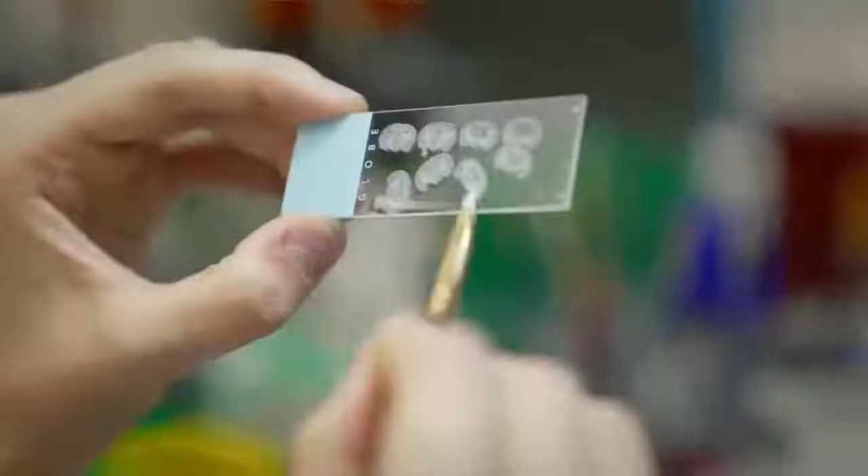My name is Ilaria Drago, and I am the Head of Education Outreach here at the Max Planck Florida Institute for Neuroscience. The high school summer internship is an internship open to the rising juniors and seniors attending a Palm Beach County school, and it is an opportunity for high schoolers that are passionate about science to spend 6 weeks in one of the Max Planck labs or core facility and work side to side with Max Planck scientists on a real scientific project.

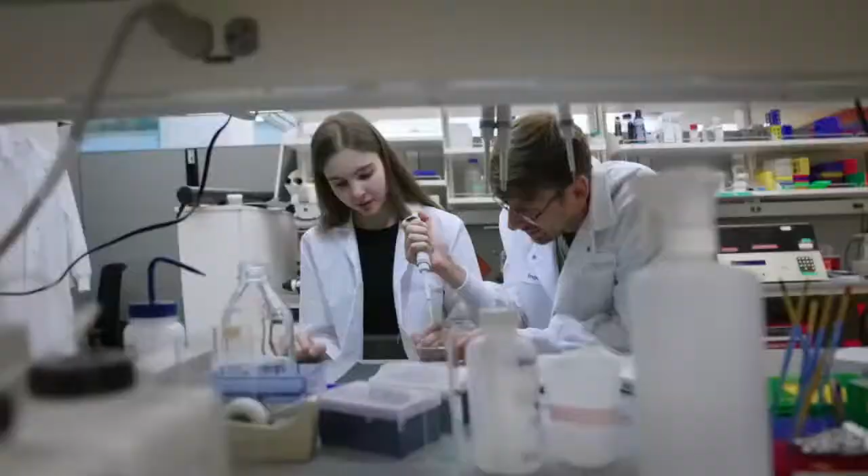This internship is the perfect opportunity for students that are excited about science and they want to move from the books to really get their hands on in real experiments, to experience the frustrations and the joy of seeing the result of your work and to understand something for the first time as a scientist and possibly having an impact on the future. They all just really want to watch what you're doing. They also have the opportunity to build long-lasting relationships with their mentors, their peers, and other people they encounter here at the Institute.

When I was applying for this internship, I was hoping to get more knowledge in neuroscience because it involves a lot of my favorite subjects in school, such as biology, chemistry, and physics, as well as some practical experience and valuable connections. I've been able to learn about new technology and how to use it, including the confocal microscope. I've actually been able to patch a few cells yesterday, so that was really exciting for me.

I'm on a robotics team with many other previous Max Planck interns, and each one of them, after the internship, came back a better engineer and a better designer. I've had the opportunity to use different CAD softwares. I've always been interested in pursuing engineering, but definitely more interested in now doing engineering as related to the human body and the human brain.

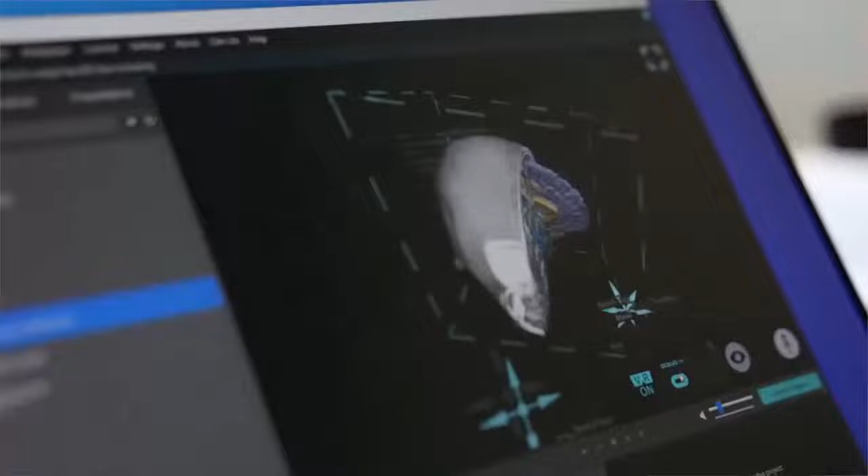You're not going to find a specialized neuroscience center like Max Planck anywhere near here. The fact that it's just in our backyard and it was open for us was a really amazing opportunity for me. I've had the opportunity to do a lot of things. I've been playing around in VR, viewing a lot of different brain MRIs, cells, synapses. I've been able to watch a few mouse surgeries. I've been able to watch virus injections, immunostaining. I've been able to see basically anything I want to see. I've been able to find someone who's willing to show me.

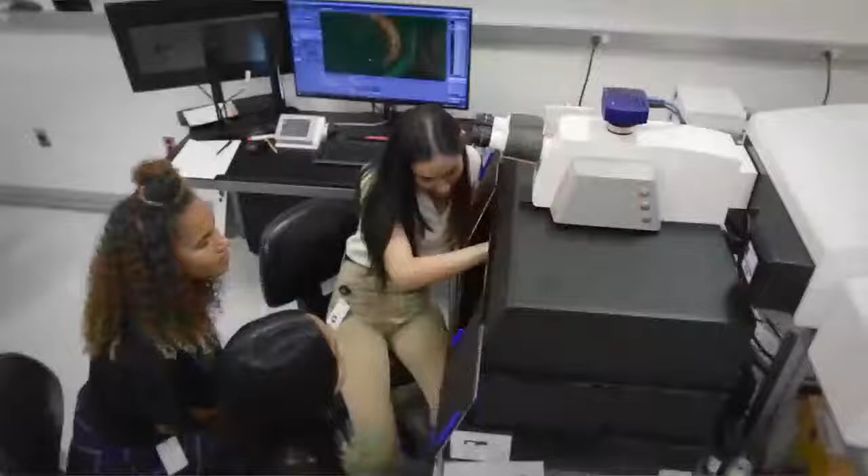This internship has gone on to solidify my love of neuroscience. We've gotten a lot of opportunities and experiences here at Max Planck. I've gotten to watch a lot of brain surgeries on mice, such as viral injection, and I've learned a lot about reading articles and doing scientific research, as well as using the light microscopy devices like the STED and Airyscan. This experience gives me hope for the future.

Sometimes there is this stereotype that high schoolers don't care much about the greater good of the world or they don't have big dreams. And I have to say that these students, year after year, they give me more hope for the future because they are not just smart and they are going to do amazing things in their life, but they are also kind, genuine, and humble humans.

So this was a video about our high school summer internship, and actually today you're going to hear more from one of our high school interns.

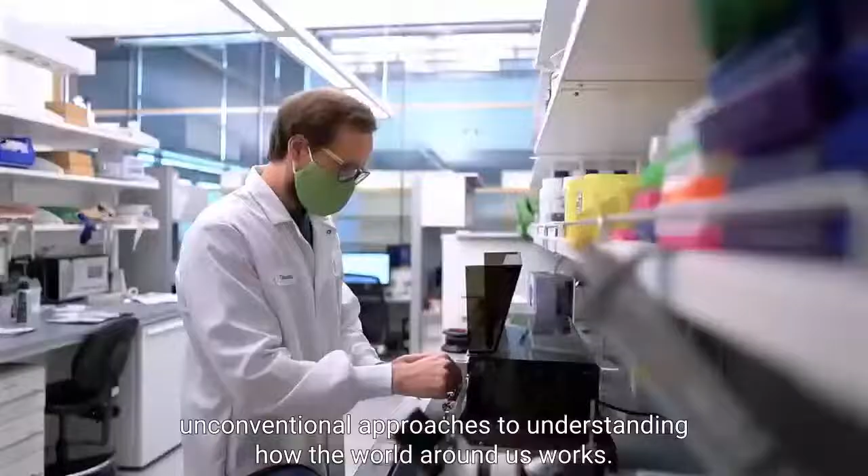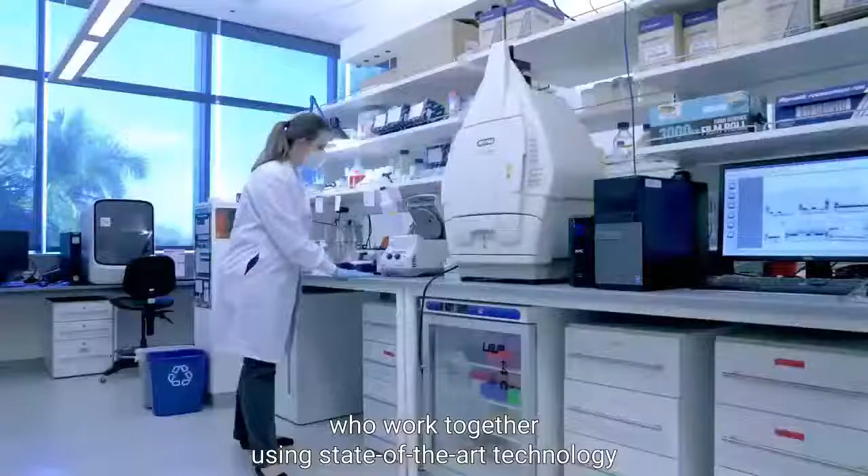What makes a Max Planck Institute special is our emphasis on curiosity-driven discovery. We encourage our scientists to take bold, unconventional approaches to understanding how the world around us works. MPFI brings together scientists at all career levels, from high school students to seasoned research group leaders, who work together using state-of-the-art technology to help unravel the fundamental mysteries of the brain. Our institute is located on a shared campus with Florida Atlantic University and Scripps Research, allowing us to engage in exciting scientific partnerships.

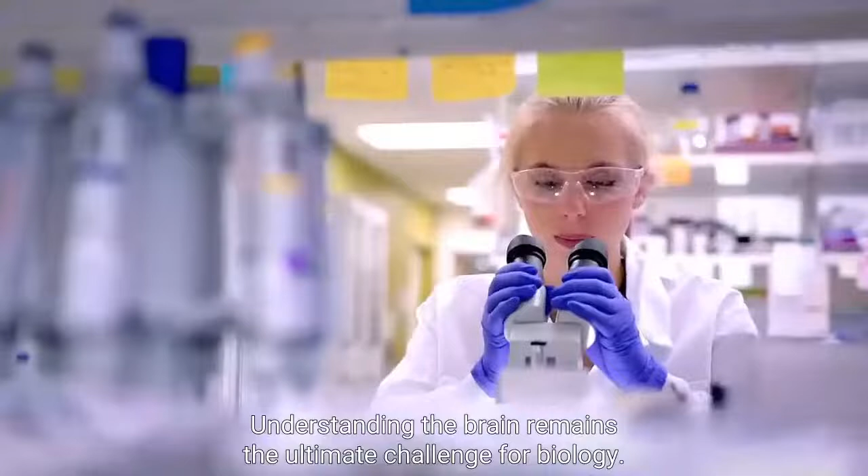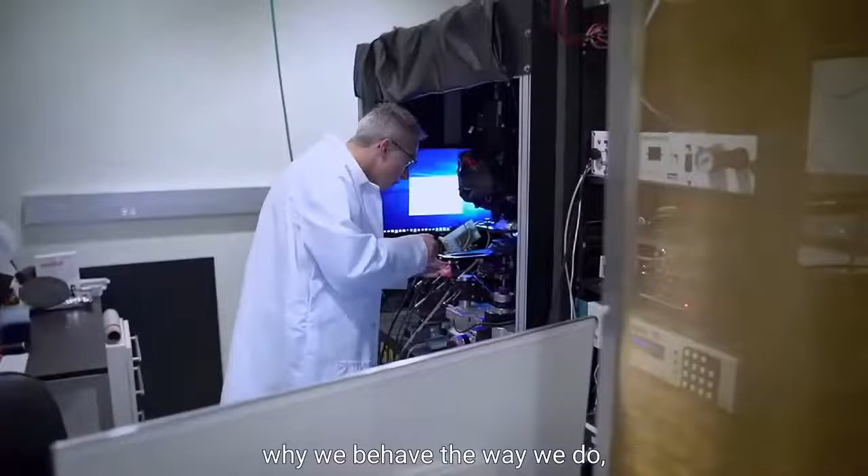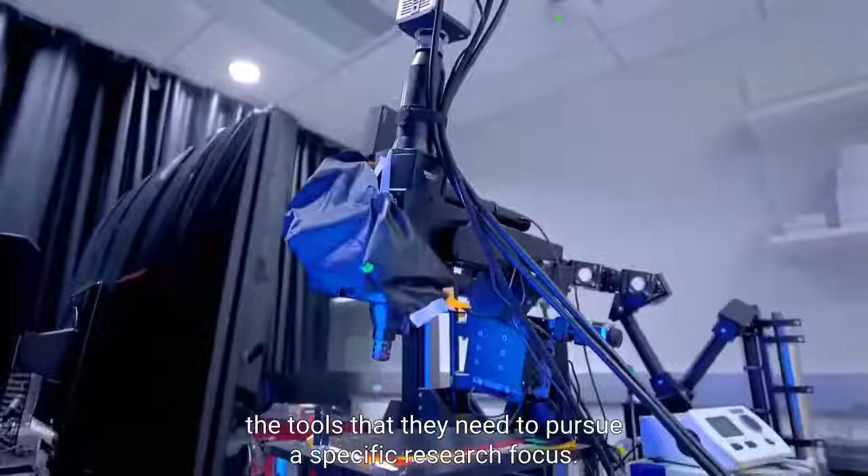Understanding the brain remains the ultimate challenge for biology. Neural circuits, the complex synaptic networks of the brain, hold the key to our understanding of who we are, why we behave the way we do, and how the debilitating effects of neurological disorders can be stopped. Flexible spaces make it possible for scientists to build and customize the tools that they need to pursue a specific research focus.

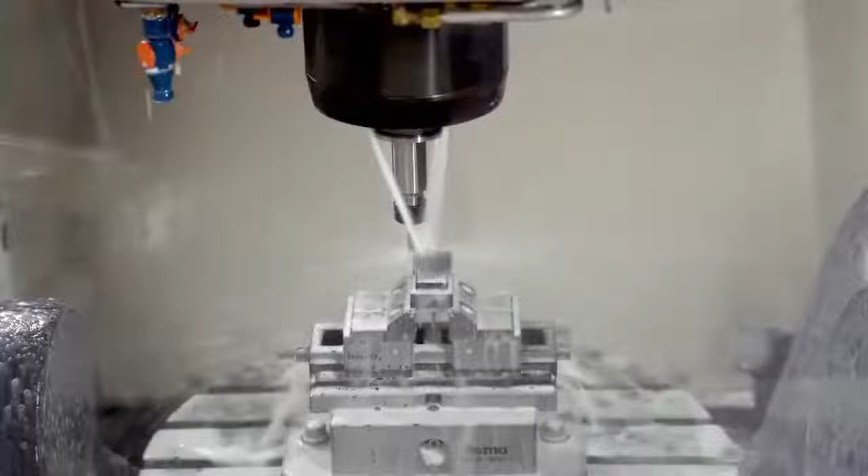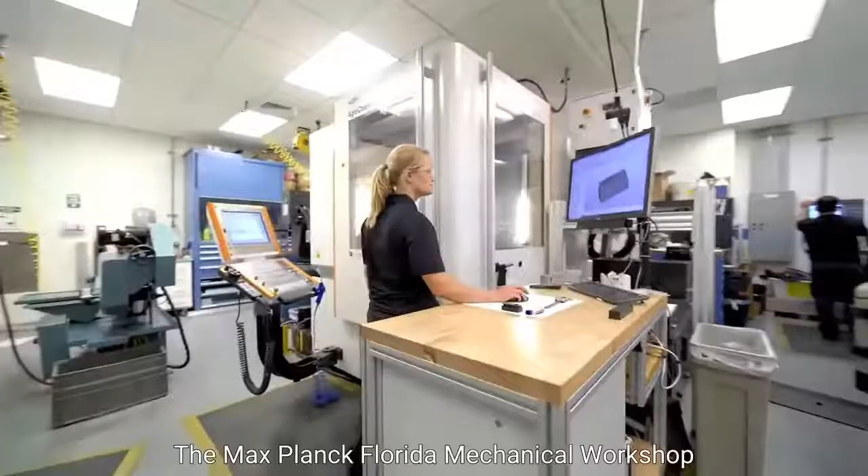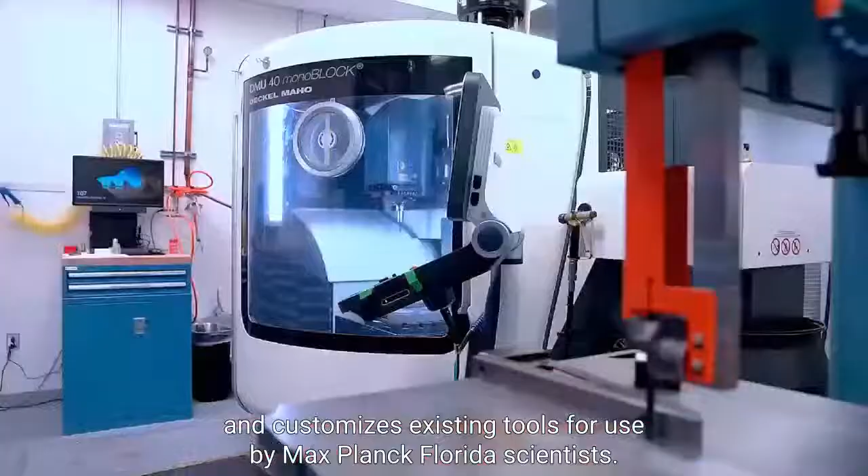Because we approach research in ways that might not have been tried before, we often require specialized parts and equipment that can't be found for sale elsewhere. The Max Planck Florida Mechanical Workshop designs and builds commercially unavailable equipment and customizes existing tools for use by Max Planck Florida scientists. Our mechanical workshop is known internationally for its quality workmanship and ability to create solutions to challenging technical problems.

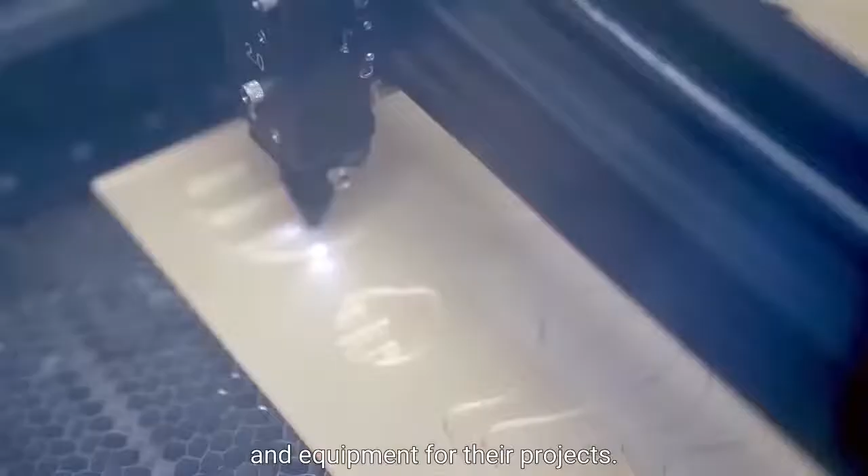Our expert machinists are often called on by leading research universities and top scientists who trust them to design exceptional parts and equipment for their projects. The mechanical workshop allows our scientists to bring bold ideas to life and helps make it possible to pursue new lines of questioning that will allow us to better understand the brain.

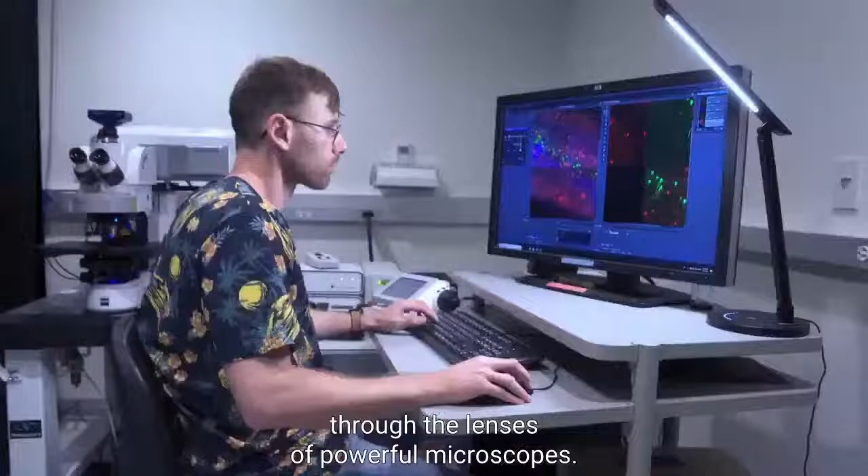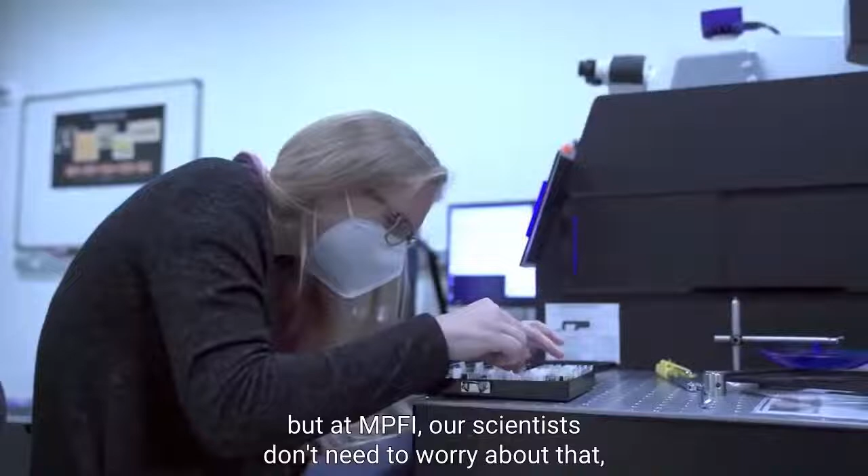Being located in sunny South Florida, there is plenty of beautiful scenery to enjoy. But while a view of palm trees may be impressive, Max Planck scientists are just as excited about another view that can only be seen through the lenses of powerful microscopes. High-resolution imaging technology is constantly changing, making it challenging for individual laboratories to keep up with new developments. But at MPFI, our scientists don't need to worry about that, thanks to the support and expertise of our talented imaging professionals in the light microscopy core.

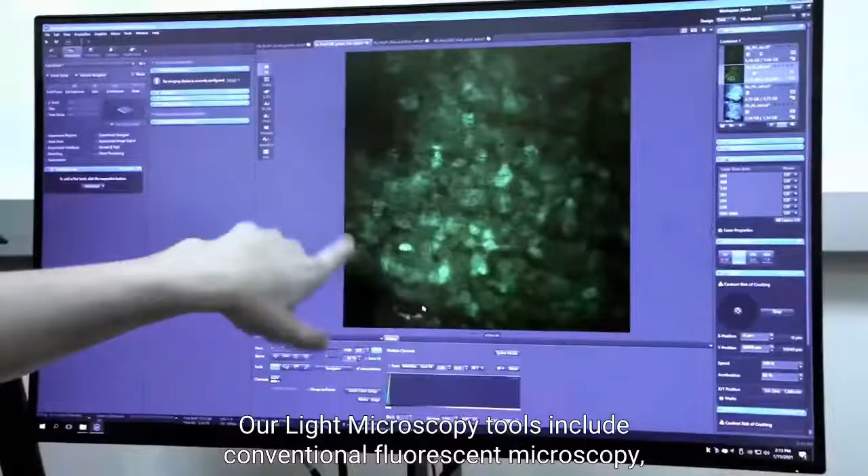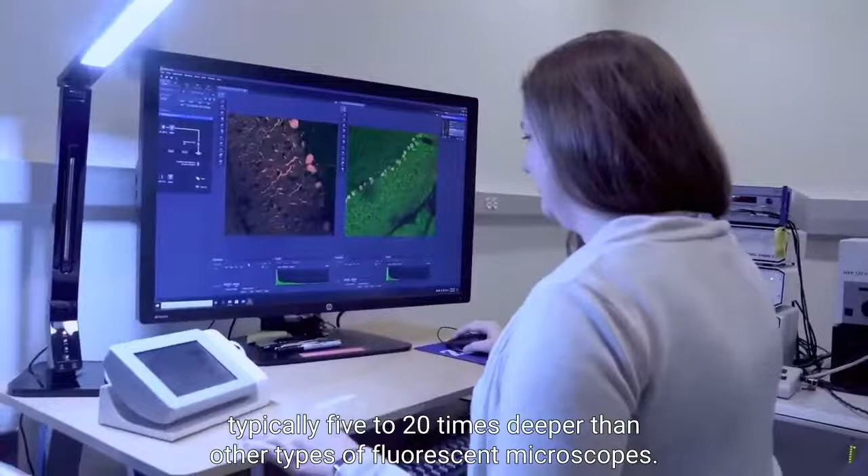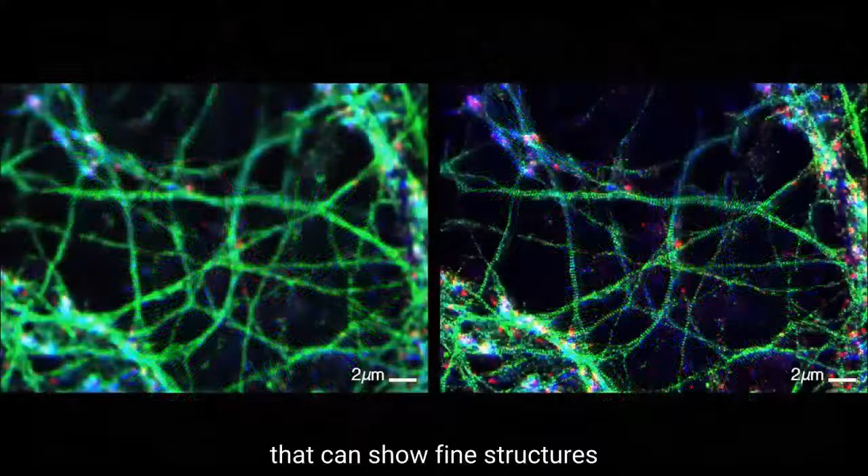Our light microscopy tools include conventional fluorescent microscopy, confocal microscopy, as well as two-photon microscopy, giving researchers the power to view structures typically 5 to 20 times deeper than other types of fluorescent microscopes. Our imaging center also features a super-resolution STED microscope developed from Nobel Prize-winning technology that can show fine structures that are invisible in traditional microscopy images.

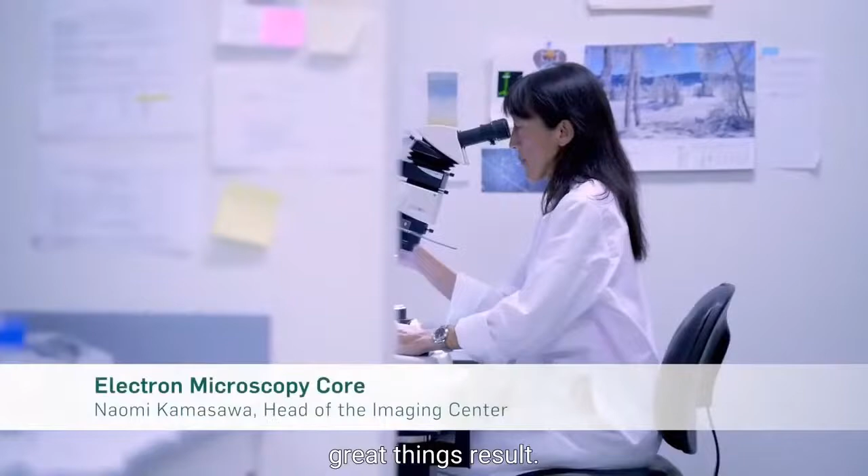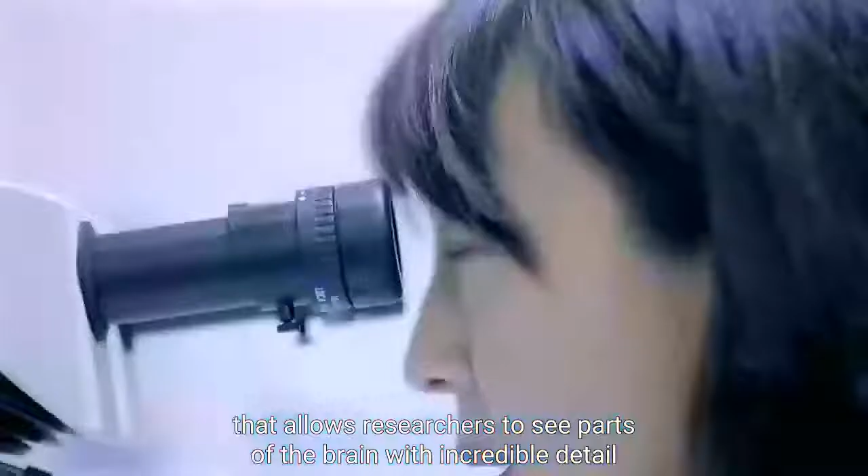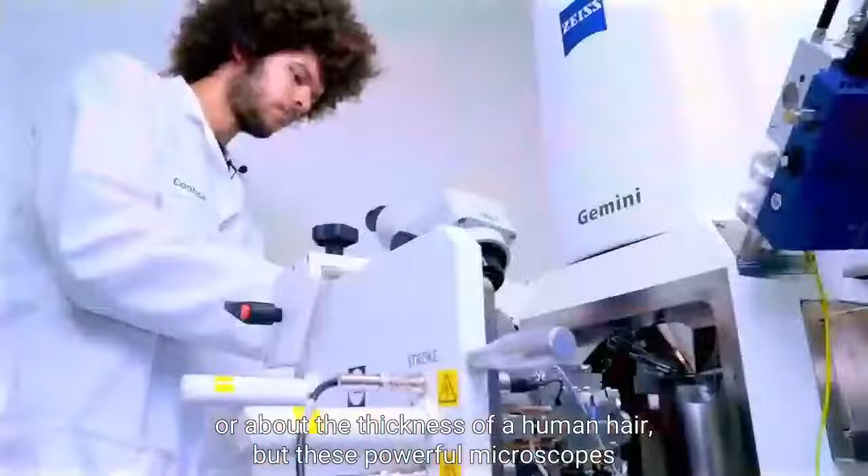When a scientist can work closely with technical experts, great things result. Max Planck Florida is home to one of the nation's leading electron microscopy facilities. EM is a powerful type of microscopy that allows researchers to see parts of the brain with incredible detail, creating dynamic three-dimensional images of the structure of cells. The human eye can see an object as little as 100 micrometers, or about the thickness of a human hair. But these powerful microscopes can see objects 100,000 times smaller, down to the single protein of a cell.

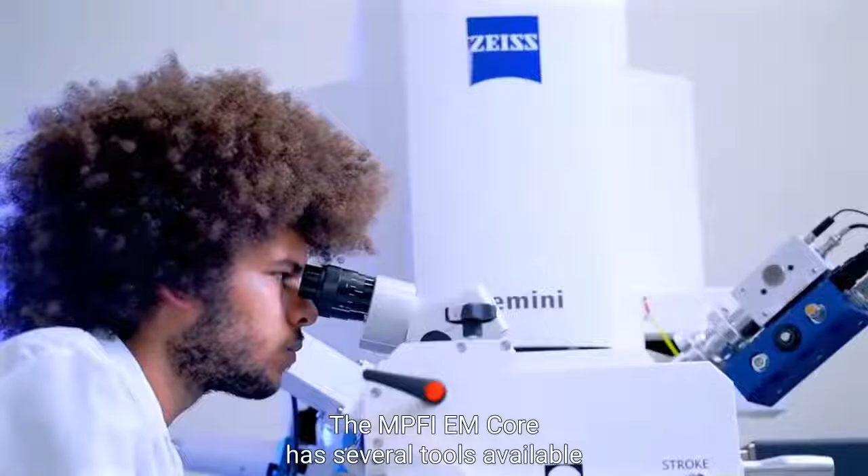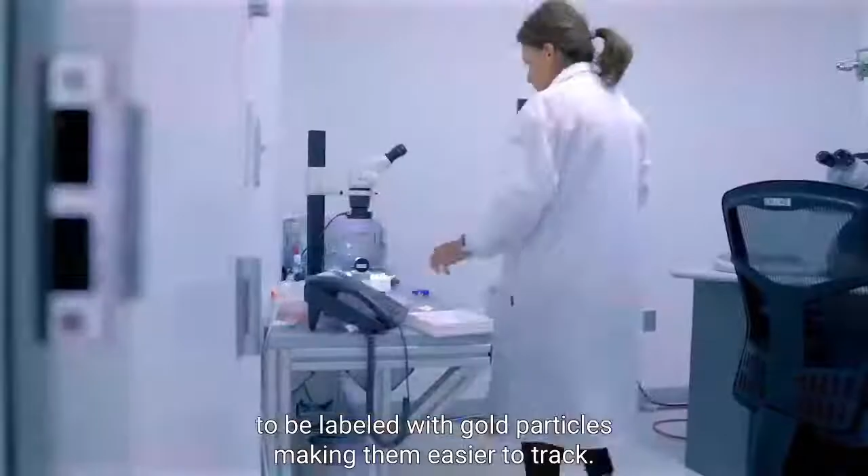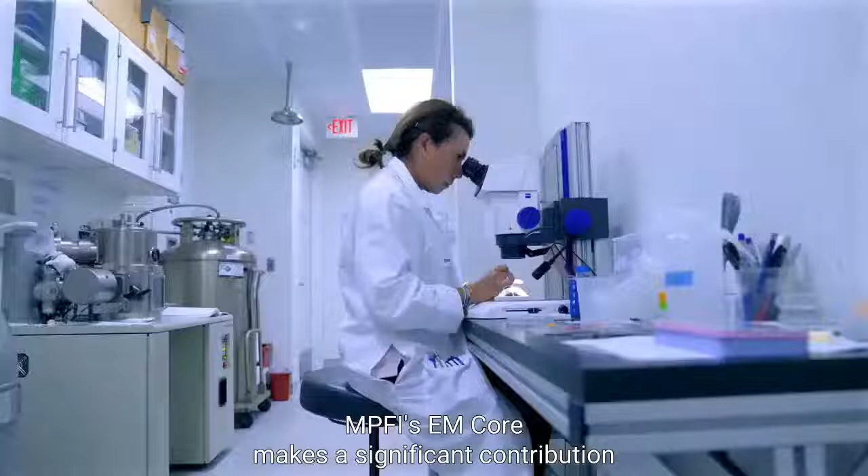The MPFI EM core has several tools available, including scanning electron microscopes, a transmission electron microscope, and a freeze fracture replica system that allows minuscule proteins to be labeled with gold particles, making them easier to track. With all of their expertise and powerful technology, MPFI's EM core makes a significant contribution to Max Planck Florida's scientific discoveries.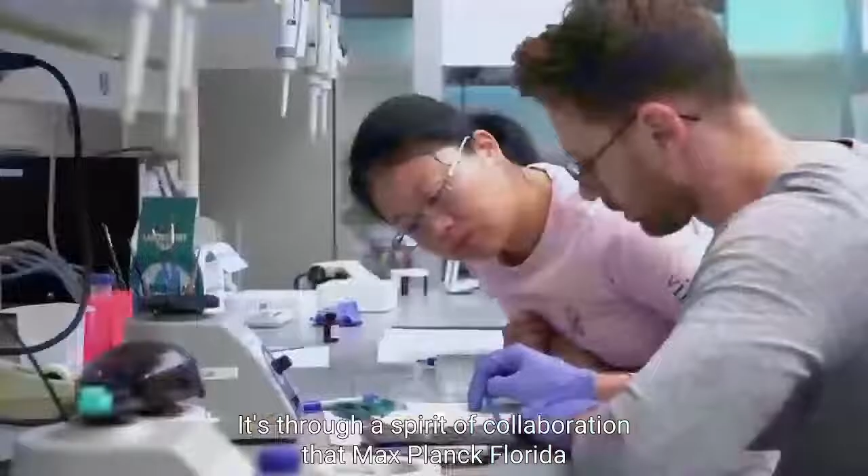Max Planck Florida is more than just a place for scientists to do cutting-edge research. It's a community. It's through a spirit of collaboration that Max Planck Florida drives neuroscience forward, using creativity to tackle some of the most important questions in science today. We hope you'll be a part of our community. Max Planck Florida, where curiosity meets discovery.

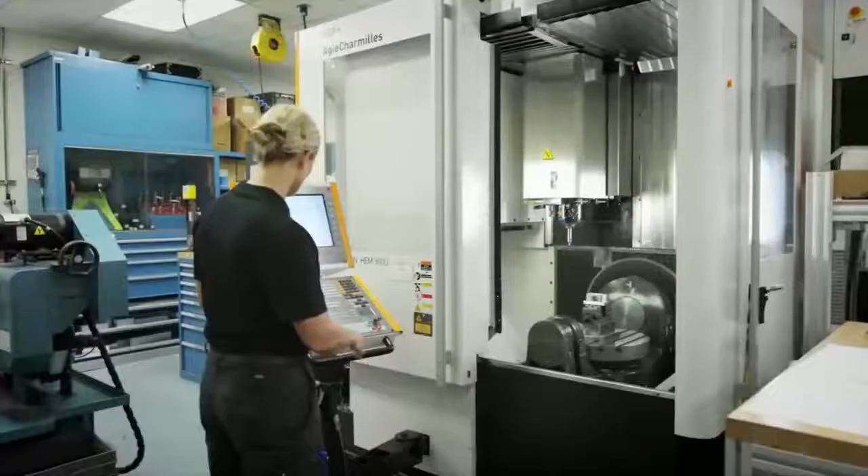Here at the machine shop, we have a variety of machinery to help us make the parts for the scientists for their laboratories. And one of the main ones that we use the most is our 5-axis CNC milling machine. I'll open the door here so you can see inside. It has the traditional X, Y, and Z axes, but the other two axes really help make our life a lot easier and the parts more accurate for the scientists.

So first we'll show the B axis, which rotates from 30 degrees to 120 degrees in both directions. And then the other axis is the C axis, which rotates a continuous 360 degrees. This allows us to reach all 5 sides of the part in addition to any compound angle within those 5 axes. So we can make very complicated parts very simply, relatively speaking.

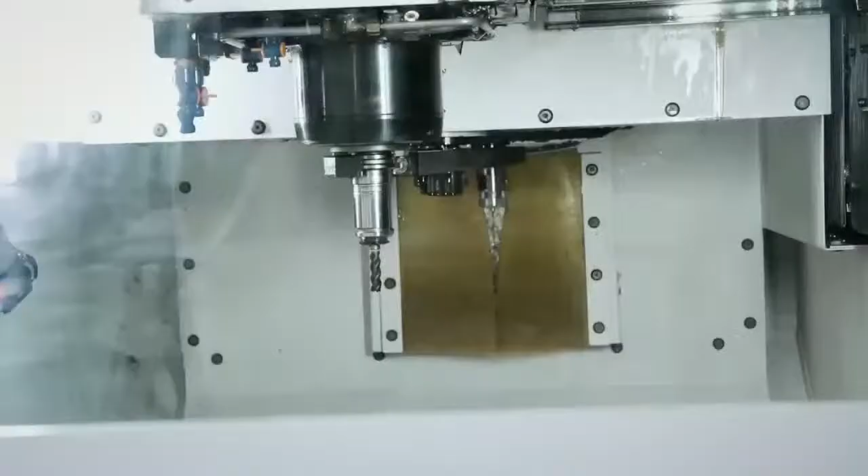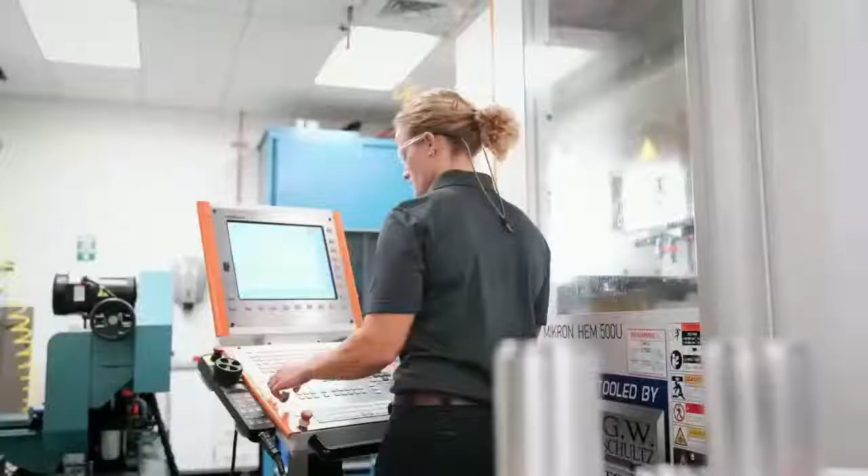We cut a variety of metals, specifically aluminum, titanium, stainless are the primary ones we use, but we also cut plastics as well on this machine. We use a rotary tool. This here is a drill, but we also have end mills that help remove the material, and we use a cutting fluid. There's a white cutting fluid, and that is just a coolant because when we're machining there's a lot of heat generated and a lot of friction generated, so that coolant helps keep the tool cool, the part cool, and helps keep the material from sticking to the tool.

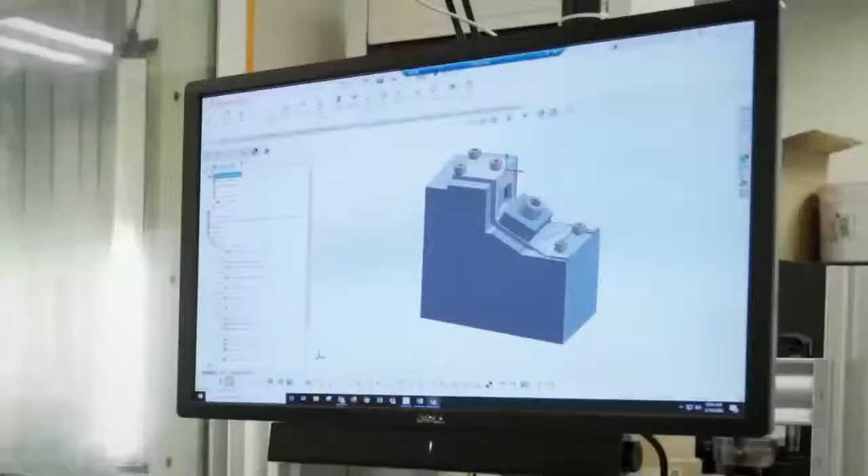So you might ask, well, how do we program these machines to run these parts? We use a software called SolidCAM, and this is an integrated software to use with SolidWorks. So we design the parts in SolidWorks, and then we can import that into SolidCAM, and we create a program. We load different tools into the program. We tell it when and where the part is, how fast to cut, how deep to cut, and we can also load fixtures.

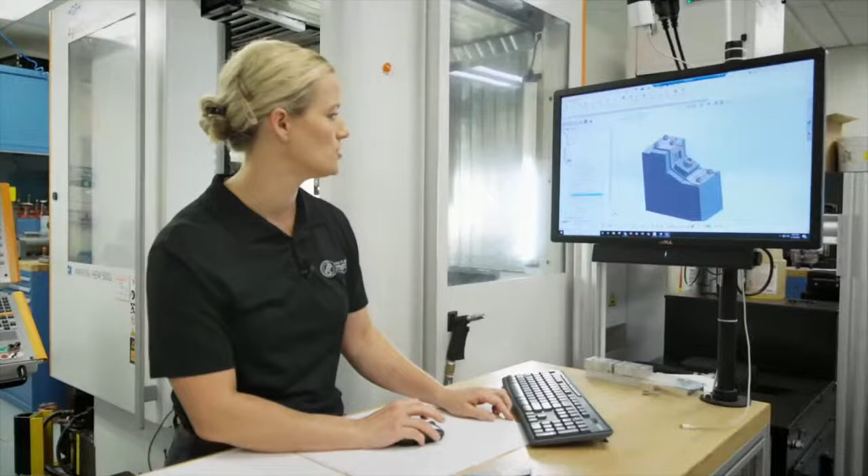So this is a very complicated sample holder, and we can't hold it just in a traditional vise, so we needed to create an additional fixture. This is what you see here, and we can load that into the simulation so we know if we're crashing into anything. We don't want to crash into anything, just like you don't want to crash your car, we don't want to crash these machines.

So here's a simulation. It is crashing into the screw heads there, but very minimal, so we're not going to worry about it. But just to illustrate that it will show you if it crashes. SolidCAM will generate the post.

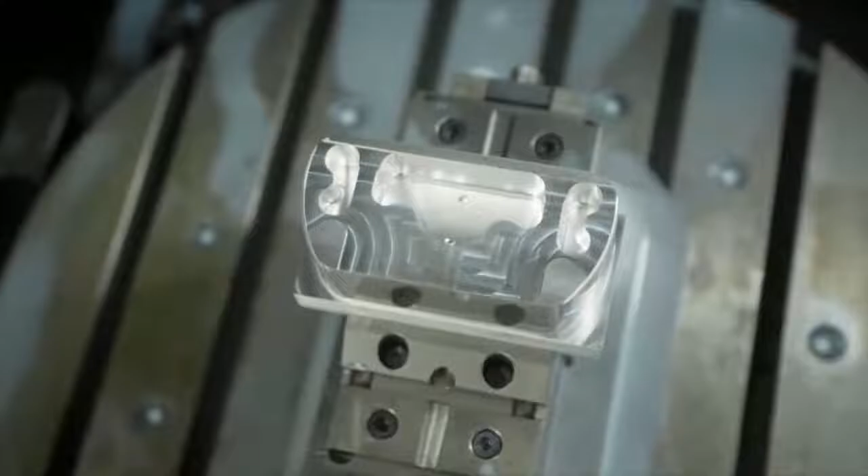The post is basically the dialogue that the machine uses. It's the machine language. And this particular language is called Heidenhain. There's a variety of different languages depending on the machine manufacturer. That gets imported into the machine, and then the program gets installed onto the machine, and once we hit start, this is how the machine runs.

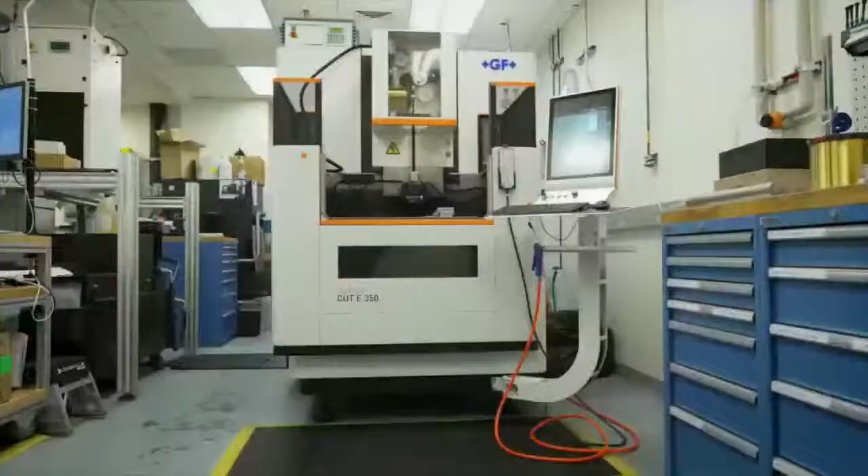So another machine that we use quite often is the EDM machine. EDM stands for electric discharge machine. It basically uses a metal wire that has a variety of current and voltage settings depending on the type of material, how thick the material is, and it uses this to create a spark around the wire. And this spark will kind of erode away at the material. It never actually contacts the material. The wire never touches the material. I always like to describe it as kind of an electrical bandsaw.

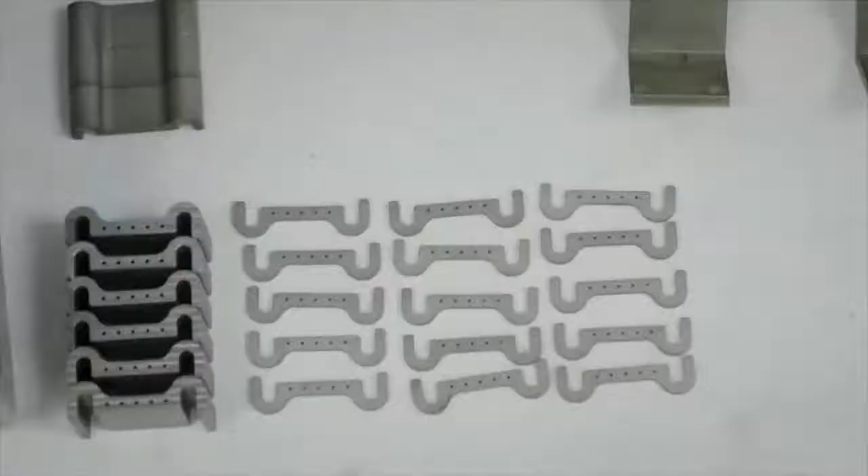The wire diameter is only 1/4 millimeter, 0.25 millimeters in diameter, which is about, maybe if you put 2 to 3 of your hairs together, it's about that thick. So very small, and with this small diameter, we're able to make very complex shapes super easy. And we're able to make things that would otherwise be almost impossible on a standard CNC milling machine. A full spool of wire holds 13 miles of wire. So it's a lot. It weighs about 18 pounds.

And the material has to be conductive, so it has to be some sort of metal. We can't cut plastic or glass or ceramic. It has to be conductive in order for that electrical current to be complete. I like to say there's nothing impossible that can be done, but it can get very, very complicated and not necessarily worthwhile.

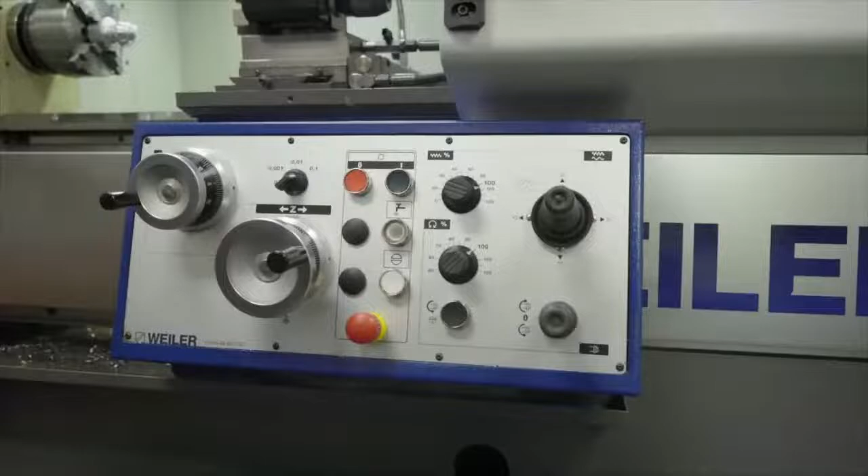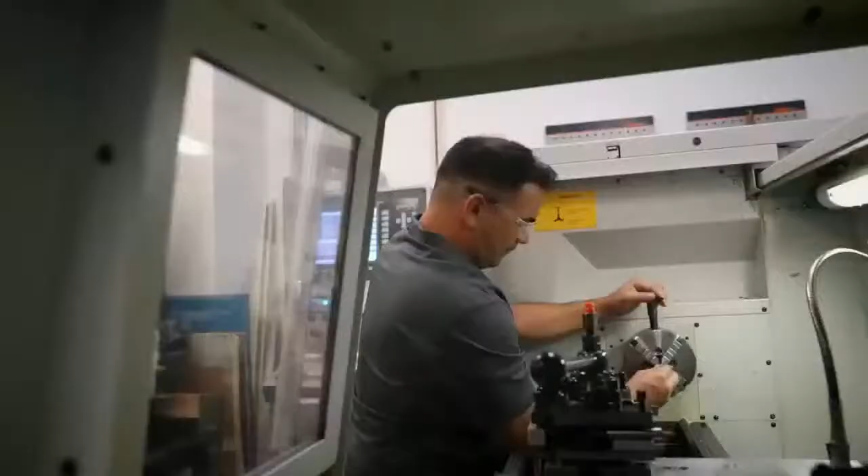So this is another machine that we use quite often in the shop. This is called a lathe. It's a CNC lathe, and it is used to turn cylindrical parts. So the mill can cut any shape, but the lathe is specifically for cylindrical parts. So you would have a round piece of stock such as this, and you would clamp it in the chuck, and you would program it to cut this profile.

An example of a part that we would make on this would be an objective adapter for their microscope. So a scientist has a microscope, they've been using this style of objective, they now want to use a different objective, but it doesn't screw into their microscope. So we make an adapter with the 2 mating threads where they can then use the new objective in their setup.

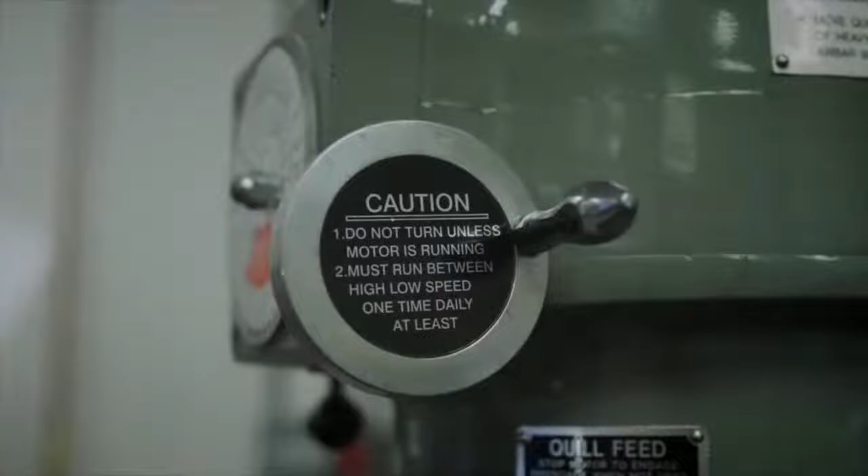This machine here is a manual milling machine. It does have a computer-aided control, so we can write simple programs. We mainly use this machine for large parts that won't fit in the CNC mill, or for kind of simple, quick parts, say a bracket to mount something to a desk or something like that. So parts that aren't very complicated, we can quickly knock them out on this machine.

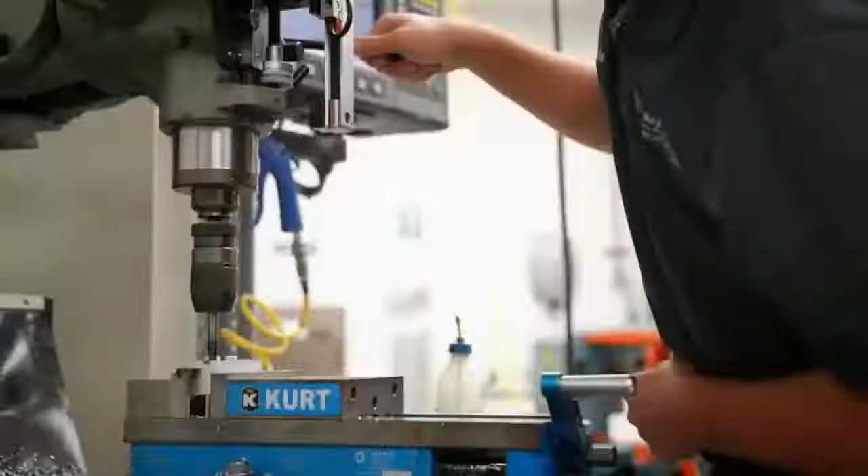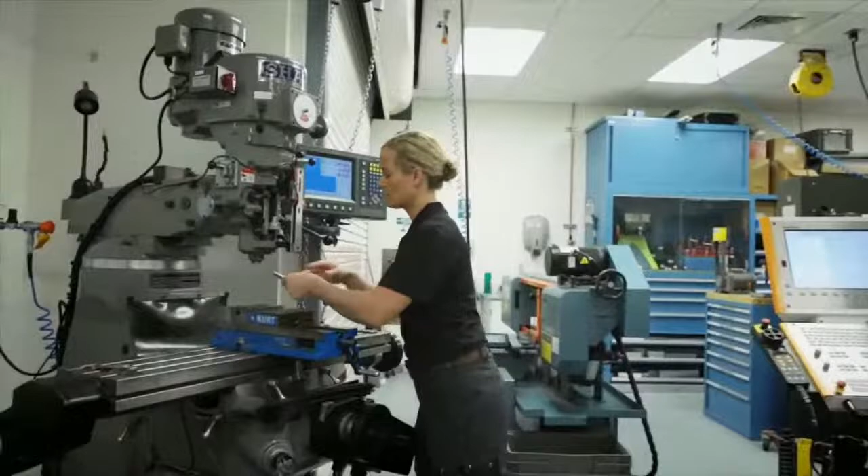Same concept as the CNC milling machine. It uses a rotary tool. This here is an end mill. This is what we use to shape the parts. We can mill the top of the part around the profile of the part. We can cut pockets in the part, steps in the part.

So most of the machines in the shop are very safe. The CNCs are completely enclosed. You can't run the machine with the door open, so it's not necessary to have safety glasses. But this machine is all open, chips are flying everywhere, so you always want to make sure you wear your safety glasses.

So I'm just going to find the top of the part by gently kissing it. And then I'm going to zero my datum.

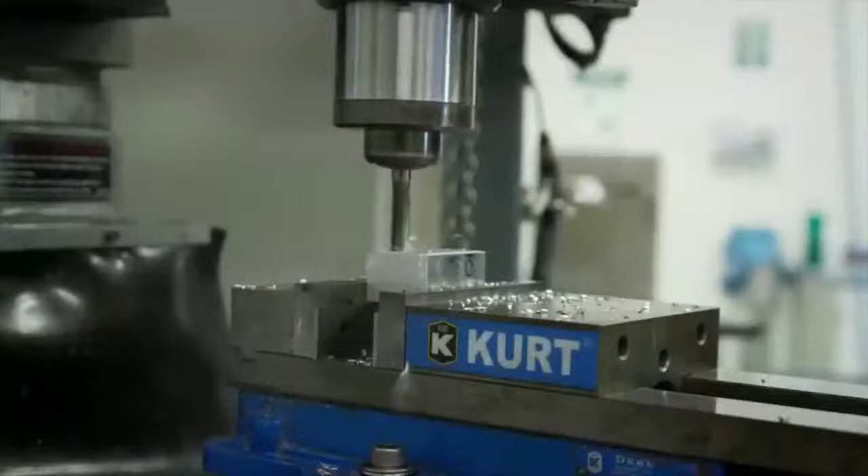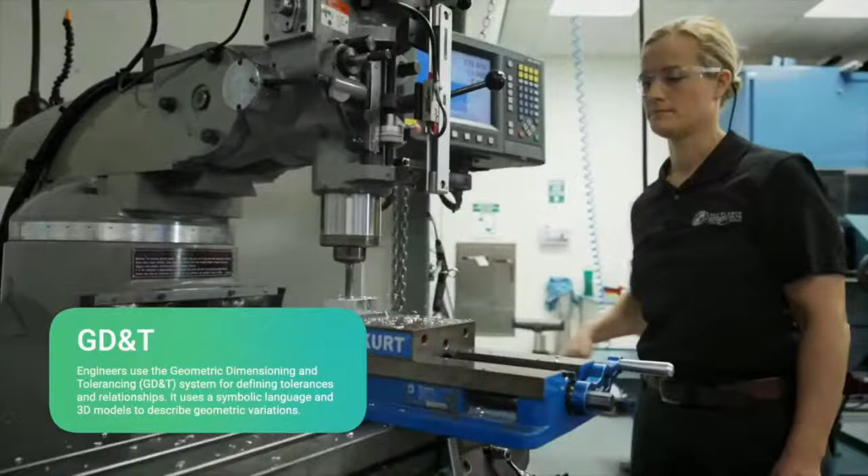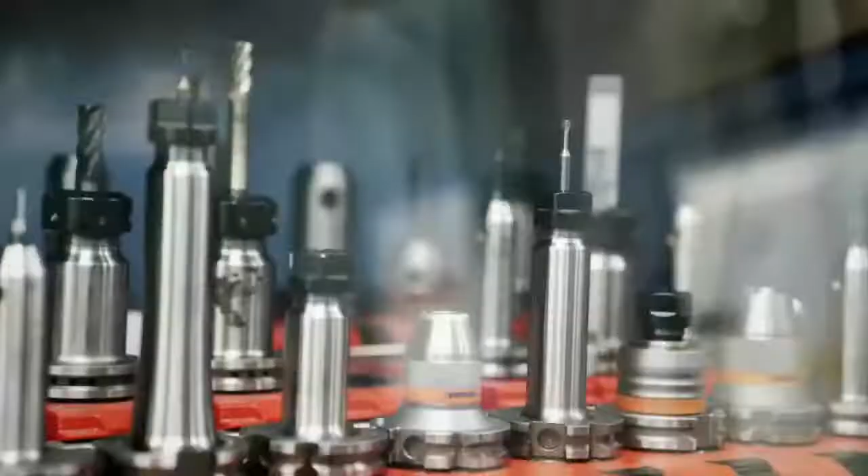And that is our manual milling machine. So this is our stock storage. We have a lot of drawers filled with a variety of material. This is kind of our big aluminum drawer. So depending on the size of the part, we are ready to grab any size material that will be big enough for the part.

So that's aluminum. We also have stainless. That drawer gets a bit heavy. Titanium, brass, copper. We machine it all.

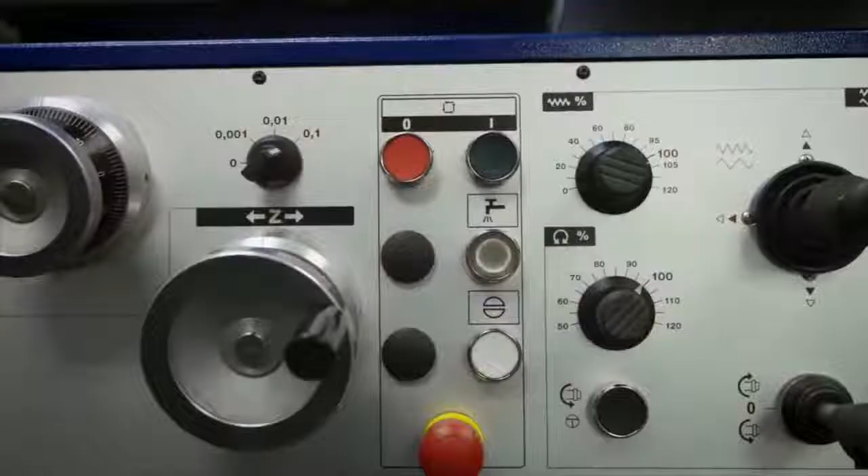And this was the video about our mechanical workshop. So now I have a few questions for Marcus and Sam. So I'm going to start with you, Marcus. If you have to pick one machine, what's the machine you prefer to work with and why?

It's this machine behind me. It's called a 5-axis CNC milling machine. And the reason why I like it so much is it allows me to create pretty much any shape that you can imagine by using this machine, cutting material into that shape. Does this machine have any drawback? Very few. Can you cut any material? Pretty much any material, yes, other than stone, maybe glass would be a limit.

And Sam, what's the machine you prefer to work with? So I would say my favorite machine is probably a laser cutter inside. I don't think you saw it on the video, just because it's an extremely quick machine. So while it is pretty limited on what it can do, you can go from your CAD designs to a physical object extremely fast. And I also love working with our manual mill inside here, which I believe you saw in the video. And while it isn't as automated as some of the CNC machines, I definitely enjoy working with it. It seems like time flies by when you're using it.

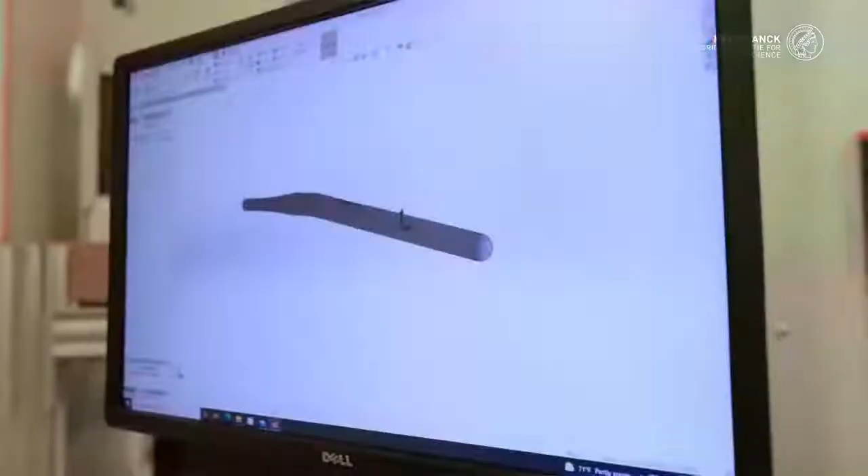The role of the mechanical workshop at MPFI is to help our scientists solve problems they face on a daily basis, whether they be small parts or larger projects. General machining is taking material away from a product that is already there, shaping it into a different form. 3D printing builds layer by layer, and you can watch every single layer.

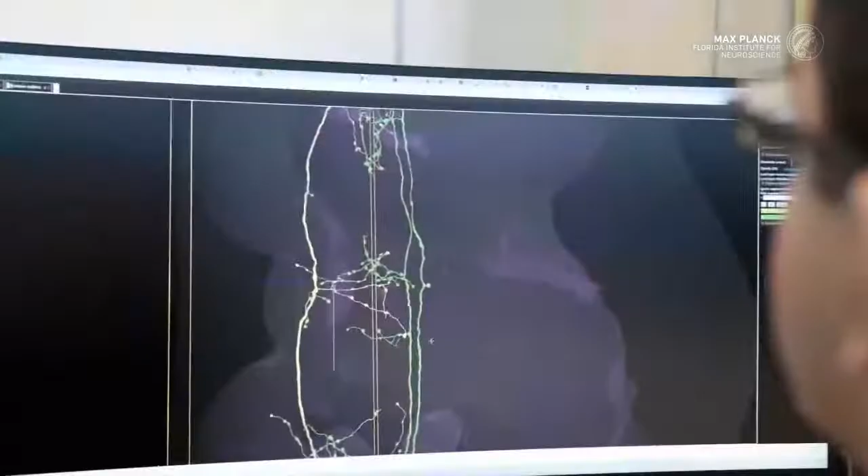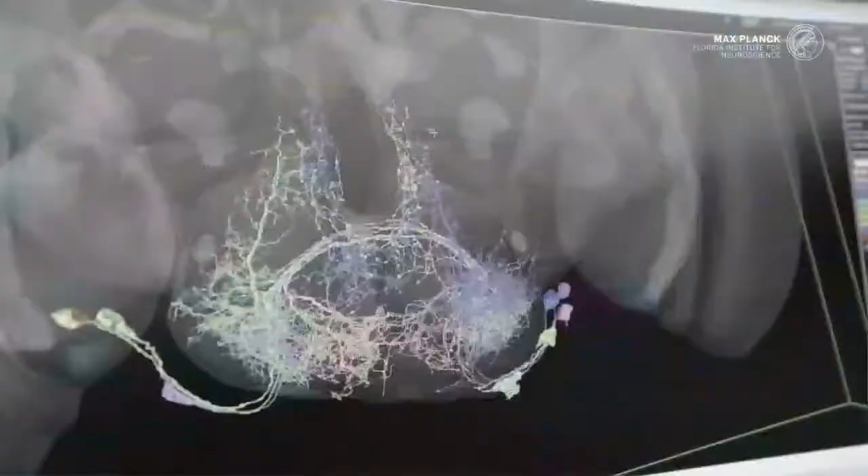The machine shop does a lot of custom hardware for everyone at the institute. We wanted a way to position the animals in a high-speed video recording setup where we can manipulate their neurons and at the same time record their leg movements at higher resolution. So we wanted a way to position the animals perfectly on a treadmill.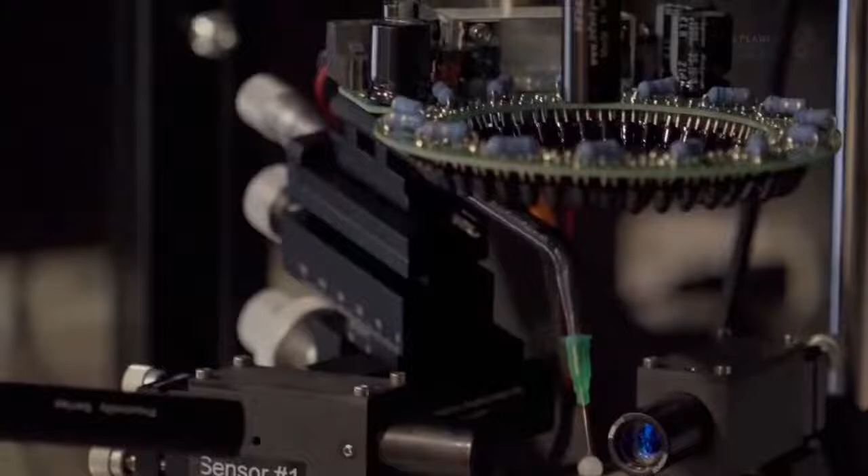This needed a custom solution, so we couldn't buy anything off the shelf because it had to perfectly fit. So we came up with a rough sketch of a holder that would help achieve that. The way he would like to hold the fly is using a manipulator.

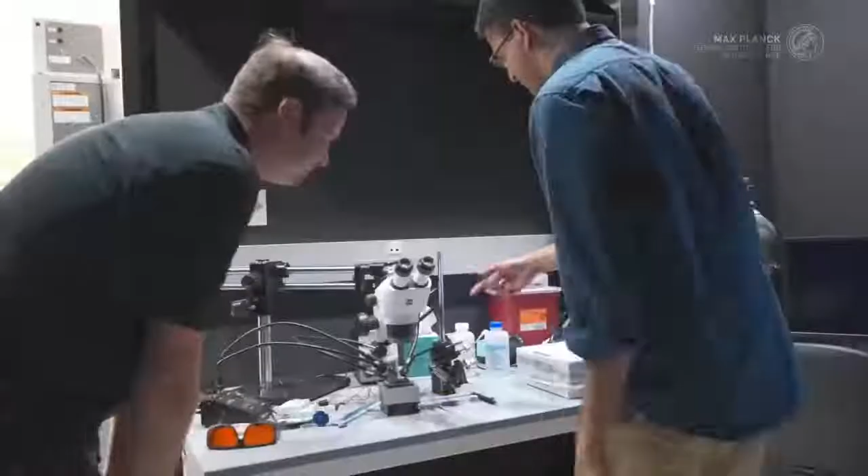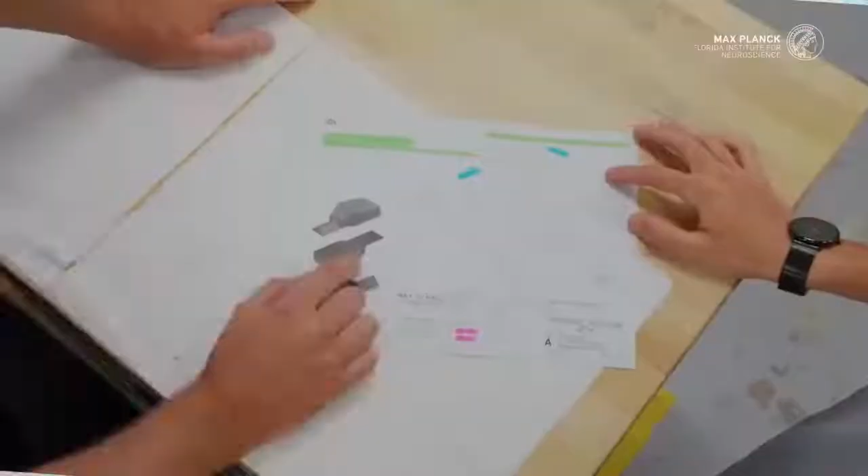Salil and I met in his lab for me to see what the issue was and to take a couple of measurements. Then I took those measurements down and talked to Sam. Sam is a high school intern that works in the machine shop after school. He does a lot of machining for us, a lot of CAD designs, fabricating things as well as electronics and programming.

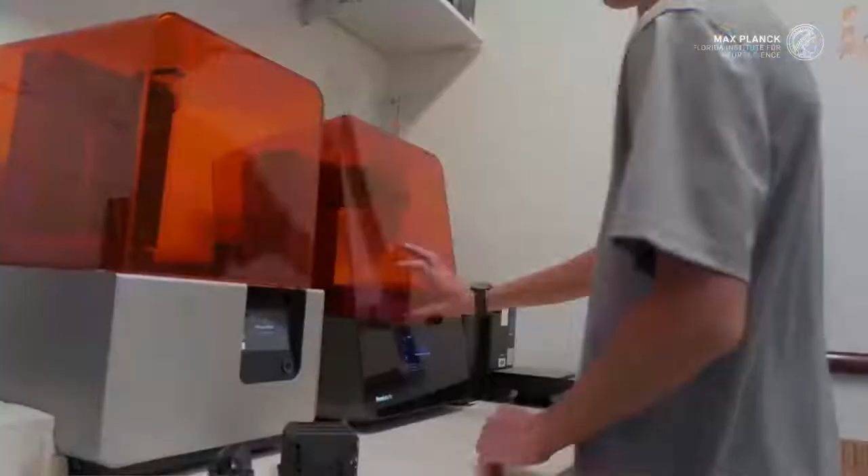I love constantly having new things to work on. Marcus produced a series of prototypes for us, and we tested all of them, using a 3D printer to print him a physical prototype that he was able to use in an experiment.

It turned out that certain things didn't work out as planned, so we needed to make some adjustments. I reprinted the initial version with the modified tip. He used that in his experiment, which turned out not to be as great, so I had to redesign the part. And then we figured out the one that worked the best.

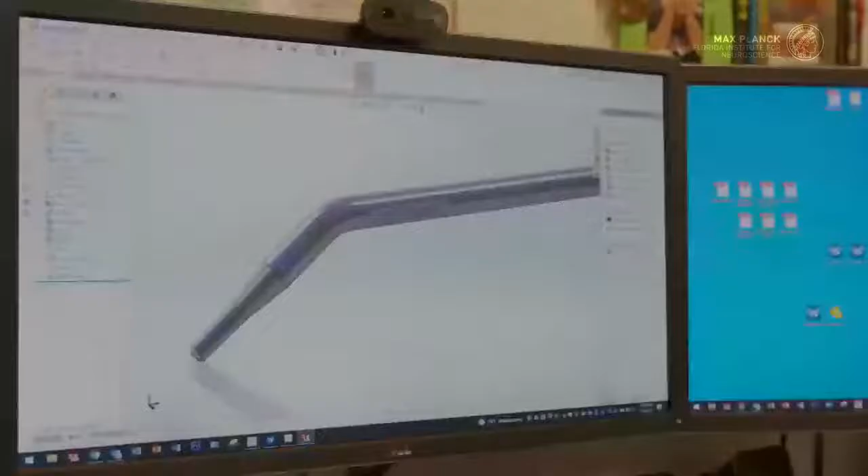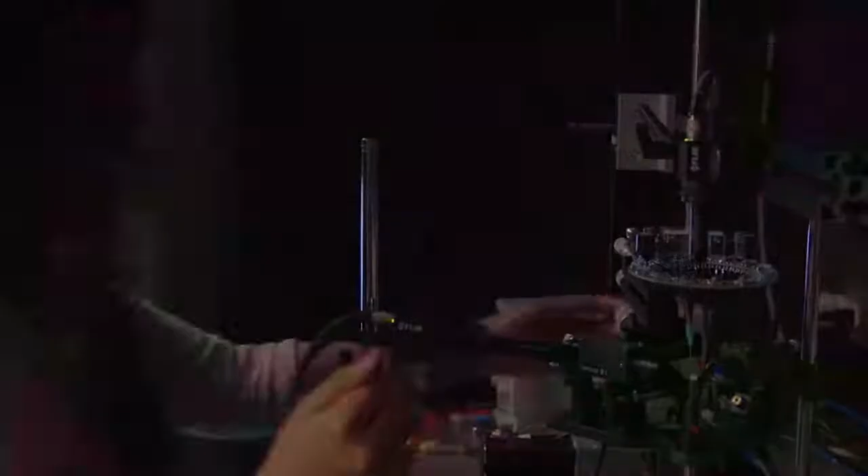So essentially this part is used to hold the fruit fly onto a treadmill. At the end of the part, a needle is placed over the end, and a fly is attached to the needle, and the larger end is attached into a micromanipulator. So basically it allows them to make very small adjustments to where the fly is.

Once it's done printing, the process is essentially to remove it from the supports it was printed with, sand down all of its imperfections, and then polish the part.

It sort of outlines the purpose of the machine shop here at Max Planck. We can make a large, intricate project or just a part to hold a piece at an odd angle. It shows the precision — we can hold a fruit fly in a specific place.

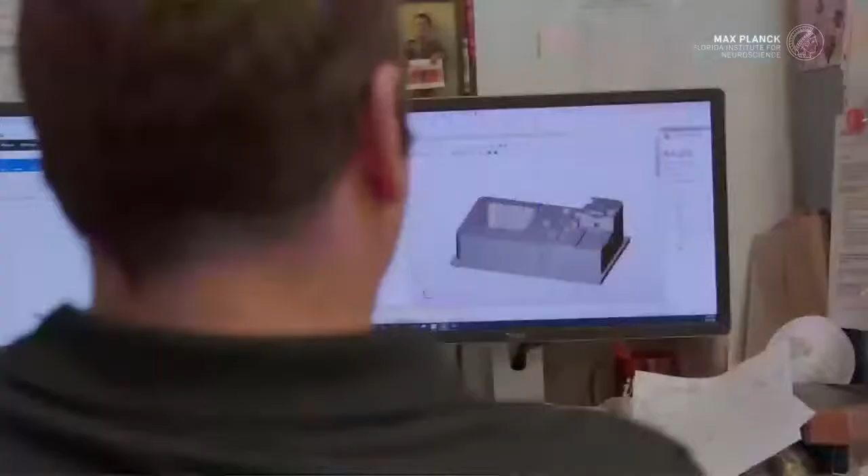Without this workshop here at the Institute, what we would have to do is essentially first produce a formal model, hire an external vendor to produce all these prototypes for us, which would take much more time and money. And more importantly, we would lose the expertise that Marcus provided, and as biologists, we would most likely not come up with the efficient design that Marcus came up with.

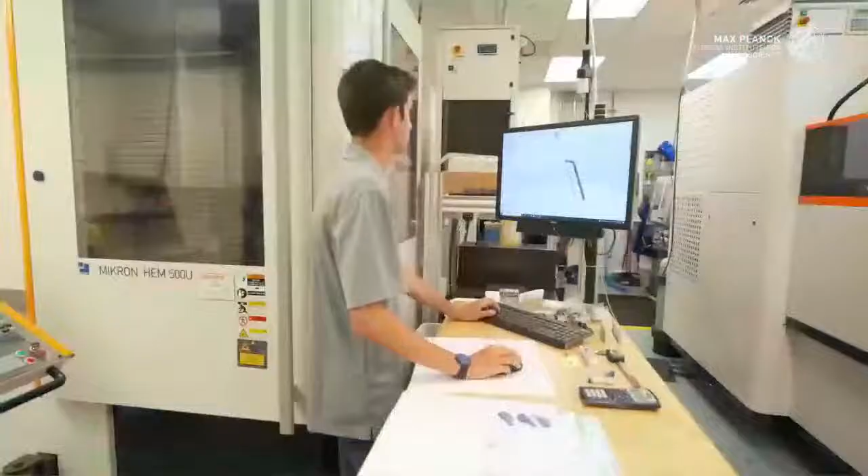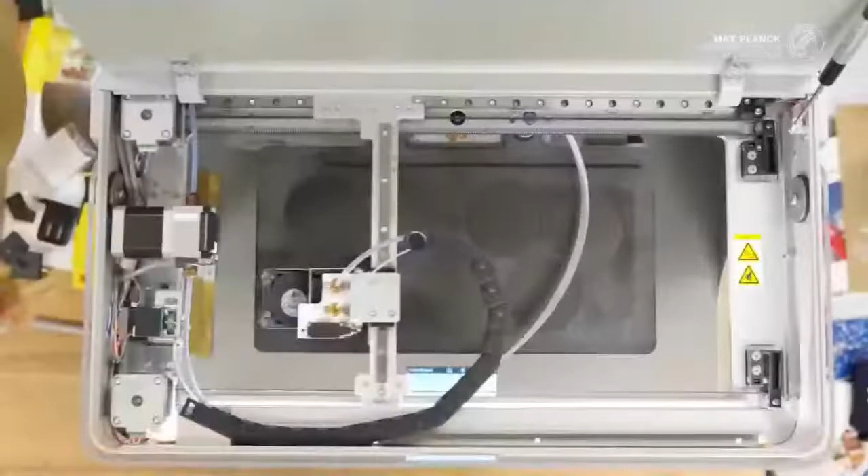This really impacts the pace of research in our lab, and in fact makes it better. The fun part about this job is that you get to meet everybody who's involved, from the idea to the finished product. You machine one part, you see it in action, and then it's very satisfying if it works.

The value here is that a scientist faces a problem and he can just go to someone and ask for help or input. In the mechanical workshop, we work together with the scientist to solve the problem.

So to start talking about this video, about the journey of a part — Sam, you did a lot of parts in the almost one year you've been working now at Max Planck. Was this part for the Bidaye lab an easy one or a hard one?

This was definitely an easier part as far as the process of actually fabricating it. All you really had to do was 3D print it, and then once we finished printing it, we wash the part and then cure it, and then we basically post-process the part.

So sand down all the bumps from the supports, and then polish the part. In terms of complexity, it's definitely not one of the more complex parts, because sometimes we do large assemblies of parts here, like what I'm currently working on.

And for people that are not really used to the terminology, what do you mean when you say that you have to cure a part? So we'll put it in basically a machine. It heats up the part and almost dries it out a little bit.